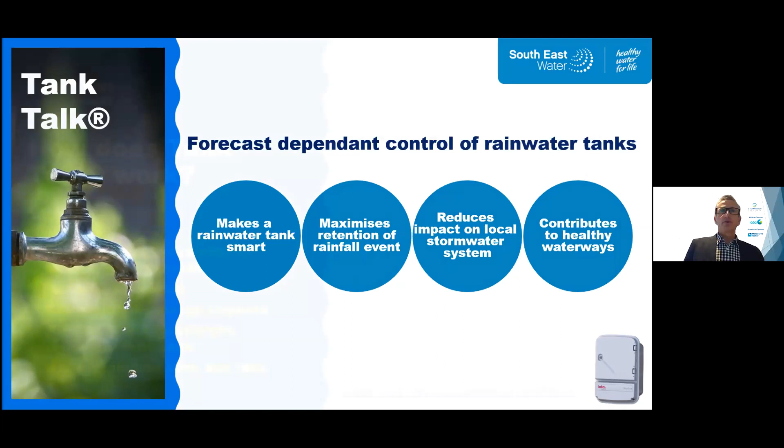I'll give an example of how that is working. Through the OneBox technology, we're able to receive weather forecast information a day or further out, and we're able to make predictions about what kind of space we would like to make within the rainwater tank, and can preemptively discharge water from the rainwater tank to make space for it once the rainfall does arrive. So here's an example on the screen of a discharge happening and the days leading up to it.

The blue line is the level of water in the rainwater tank, and the green line shows rainfall events recorded at a local bureau rain gauge, not immediately on site but nearby. On the left-hand side of the chart, there's a rainfall event on the 11th of August that fills the tank, then another rainfall event fills it again.

Each time, the OneBox technology calculates whether that rainfall event can fit in. On both occasions, it knew from the level in the tank plus the available roof space it was catching from that it could fit the rainfall event in the tank, preserving that water for household demand.

Further towards the right-hand side of the chart, the tank talk device received weather forecast information that a significant rainfall event was happening. That little red blip indicates the valve has opened. You can see the blue line of the tank level decreasing, followed by the rainfall event that then refilled the tank again, so the majority of that rainfall event was captured within the tank.

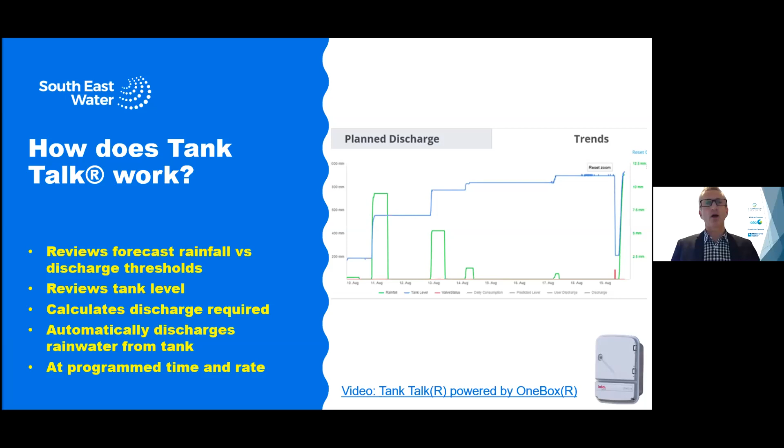We're beginning to apply this in a number of ways.

It can be applied in the residential setting, and we're rolling it out in our Aquarevo estate, which we'll talk about shortly. It's also finding application in office and apartment buildings—we've got it fitted on our own office block in Frankston at Water's Edge, and we have another apartment site in the Fisherman's Bend precinct that we're using as a pilot and demonstration site for much more intense living.

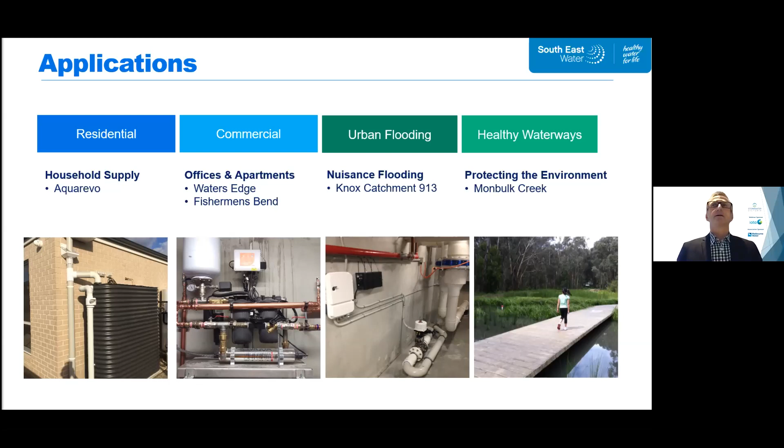We'll talk about Knox and Monbulk Creek and how we're using that for nuisance flooding and for healthy waterways, and we will discuss those shortly.

But before we get there, I wanted to briefly talk about some of the research we're doing with Tim Fletcher's group, the Waterway Ecosystem Research Group, of which Daniel Zhu, our PhD student, is sitting on the panel today—so please throw all the hard questions at him at the end.

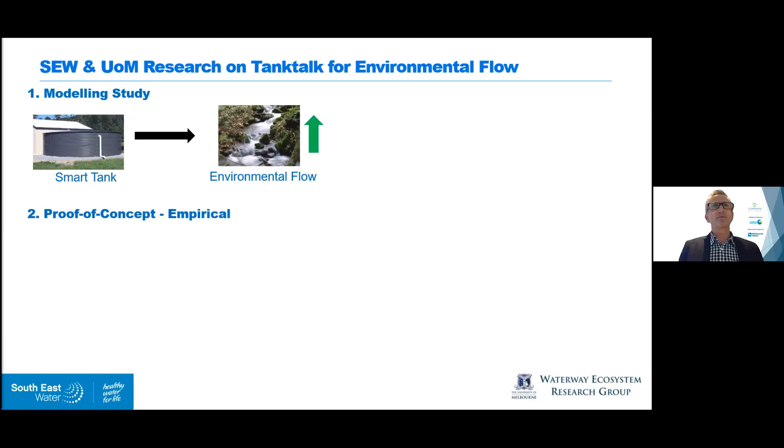This has been a study we've been doing for a number of years, primarily a modelling study that has looked at taking real rainfall events and real demand to demonstrate how we can best achieve these multi-objective outcomes of environmental flow, stormwater retention, and household demand.

Through Daniel's work, and he's published papers on this, we've been able to demonstrate that this is possible with the right tank size, the right catchment size, and the right thresholds for the system to operate within. It's possible, and we've also developed an understanding of how to flex to favour one scenario over the other—and we can continue to use that model.

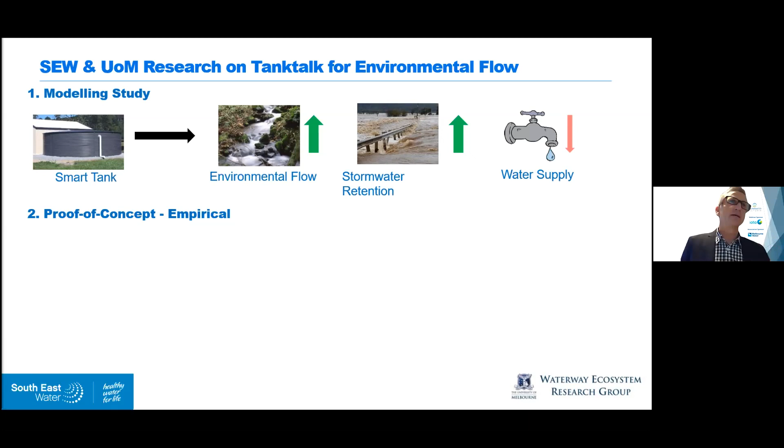Daniel has also been testing out that model, and we have a fully equipped house—a real person's house in Caulfield—that has the tank talk set up and was prepared to let us add even more monitoring equipment so we can monitor all the ins and outs, know the rainfall on site, and start to validate some of the outcomes of the model.

We simulate, more than simulate—we're actually doing stream flow releases on site. That's given us some very valuable learnings, and we're continuing to optimize that.

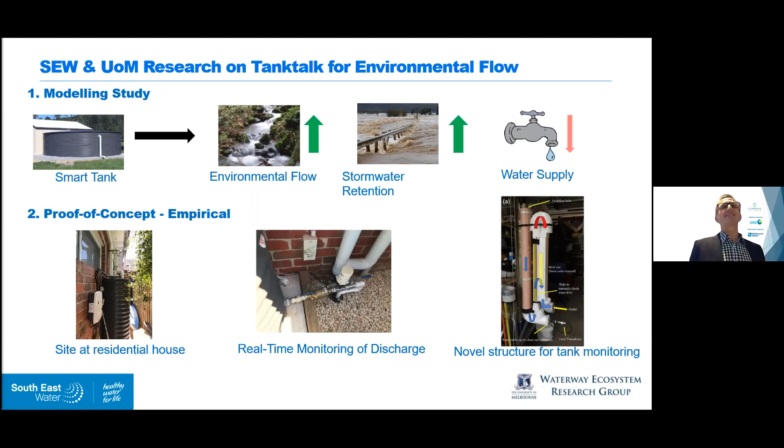So let's see if this video works. It's a very short video—Daniel happened to be on site knowing when a discharge was scheduled to happen.

This is a scheduled discharge simulating what we do into a stream flow. In this case, this was about a 5-litre discharge happening every hour. We've been able to decrease that amount, and that's part of the ongoing optimization, down to 1 and 2 litres an hour. We can change the time frame of that, and we can change when it happens during the day.

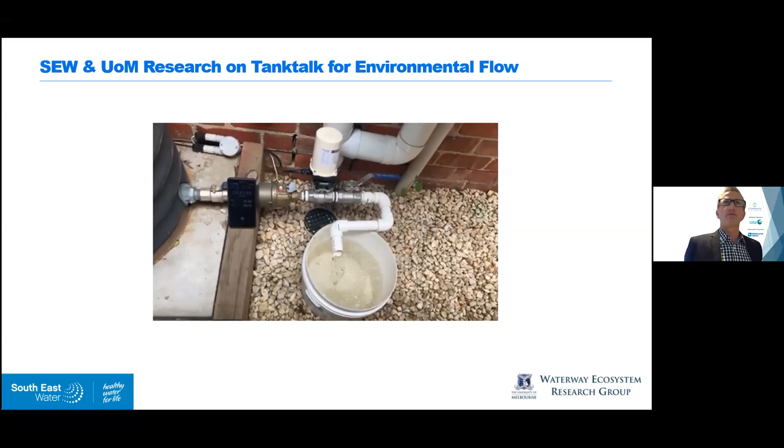So that's an example of how we're validating the model in a real live environment, showing all the ins and outs. Further building on that research work, through our own experience and through Daniel's research, we've understood that it can be quite limiting to only have a 1-day look-ahead on the forecast period—weather does change, we all understand that. So we've been working to improve the forecast accuracy, and hence the data that Tank Talk uses to determine its discharges.

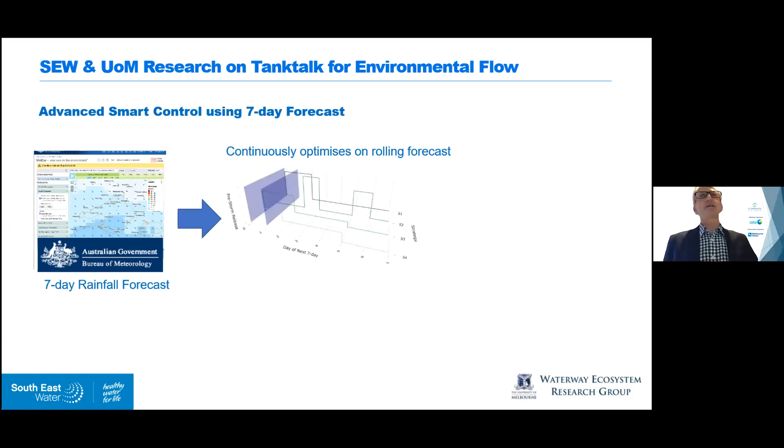So Daniel's been developing a modelling system that looks ahead 7 days and continues to optimize each day as that rolling 7-day forecast moves forward, across 4 different scenarios, looking at how, if we were to apply that modeling outcome into a tank system, what would be the result on those multi-objectives we've been talking about.

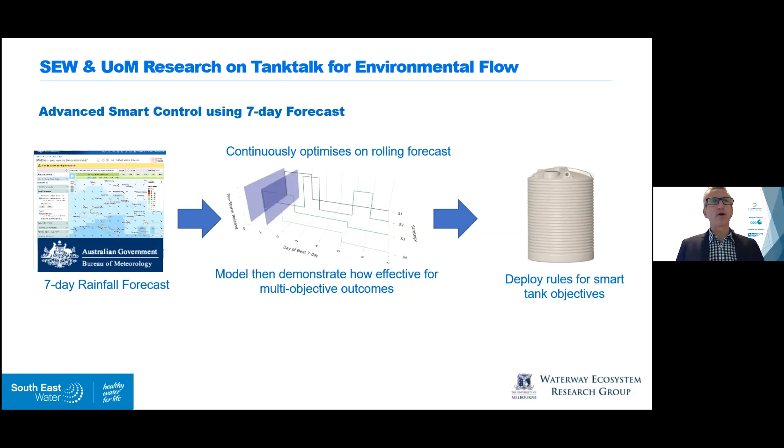So here's an example output of the model, where on the left-hand side, the top blue line is actual rainfall the model used, a real event. We can see the green line representing scheduled discharges, actual discharges from the rainwater tank.

On the left of that chart, the model decided that within the 7-day look-ahead period, there was rain coming, so it would do a release. Then, as the forecast changed, it's more about a forecast change than error, it decided to do another discharge.

The whole time that green line is maintaining an environmental flow into the system, such that when the rainfall did actually happen, the red line shows the overflow that would have happened from the tank without the smart system in place. There are follow-up rainfall events showing significant overflow from the tank if the smart system wasn't involved.

It continues further down the track to return to maintaining that stream flow. So there's plenty of optimization still in the modeling, but we've been able to demonstrate and continue to improve, and we'll look to apply this 7-day advanced forecasting on some of the sites we have.

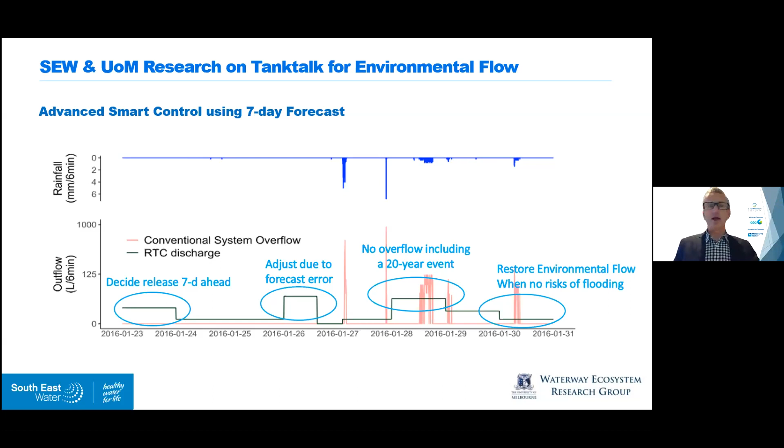I want to move on to Aquarevo. Aquarevo is probably our most progressed and advanced deployment of smart tanks in the real world.

Briefly, maybe some people are sick of hearing about Aquarevo, we've been talking about it for a while, but really quickly, Aquarevo is a residential estate in Lyndhurst near Cranbourne, southeastern suburbs of Melbourne, with 460 lots jointly developed by South East Water and Villawood.

There are now well over 100 houses being built and occupied on the estate. Each of those houses gets a rainwater tank supplied and maintained by South East Water. That rainwater tank provides rainwater for hot water for shower and bathing.

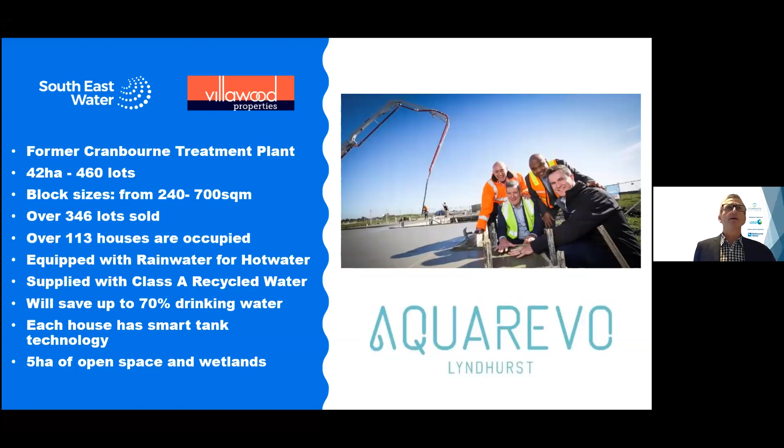That system is monitored and controlled by our Tank Talk technology as well, to make sure it's operating as it should, with any alerts and alarms that we need to respond to. So here's some drone footage of the Aquarevo estate.

This was taken late April. So some real quick features I'll point out: there's the extensive waterway running down the middle of the estate.

This view is about half of the estate, the southern half. There's this much again looking back the other way. That waterway is extensive, connecting at the top of the screen, the south end of the estate, with the Marriott Waters waterway. It actually creates an extensive network, quite a few kilometres of waterway in that area.

If you can see, there's a roundabout in the middle of that picture. Go to the top left of the screen to another roundabout. There's a house on the corner there, to the right of that roundabout.

That is our house. That is the Aquarevo house where we continue to develop and test new technologies and approaches, and optimize things we do in Aquarevo. I will hopefully get time to touch on that house later in the presentation.

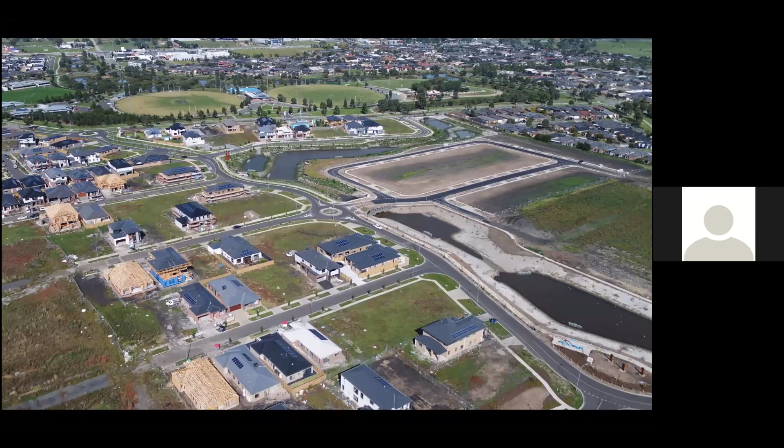The other thing I'll draw your attention to on this slide is the size of the houses. We continue to be staggered by how big some of these houses are and how much of the block they continue to take up.

The size of the house is not something we have control over, but what we do have control of is how much of the roof they catch for rainwater. There is a minimum of 100 square metres that they must capture into their rainwater tank on their site, otherwise they don't have approval for their building and house design to go ahead.

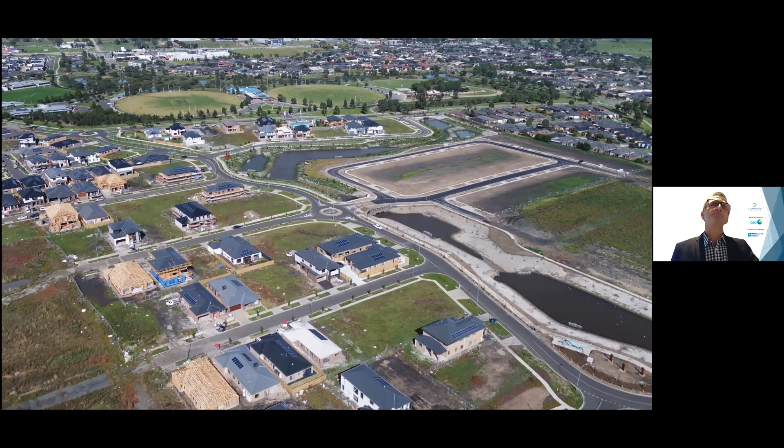So we are installing Tank Talk on site at Aquarevo. I'll move to the next one.

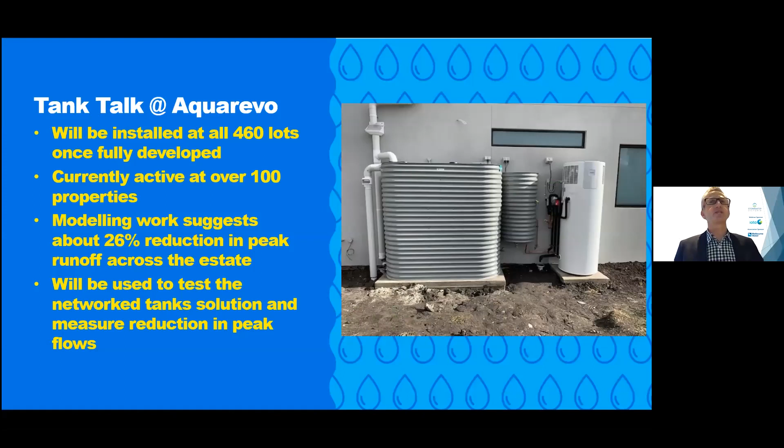We're now getting to a scale in Aquarevo where we're actually starting to see the system work and getting enough data as people are moving in, some very preliminary data. We haven't shared this with anyone yet. We did some analysis in preparing for this presentation, and we'll continue to update this progressively.

In May, for example, 62 millimetres fell on site in Aquarevo. We captured over 300 kilolitres of that in the tanks of Aquarevo houses, across 60 houses. We just looked at a subset of 60 houses in this particular piece of work.

176 kilolitres of that rainwater was actually used, and 61 kilolitres were discharged by Tank Talk, preempting a number of the rainfall events that then fell on site. Our analysis so far is actually showing us plenty of opportunity for improvement, which is great.

What we get when we start to scale these kind of technologies is the potential to maybe use some of the 7-day look ahead forecasting that Daniel's working on. We still believe there's some significant overflow happening during these events. We'll look to try and adjust some different thresholds to capture more of that while still not leaving our homeowners short on the rainwater they have for use in their hot water systems.

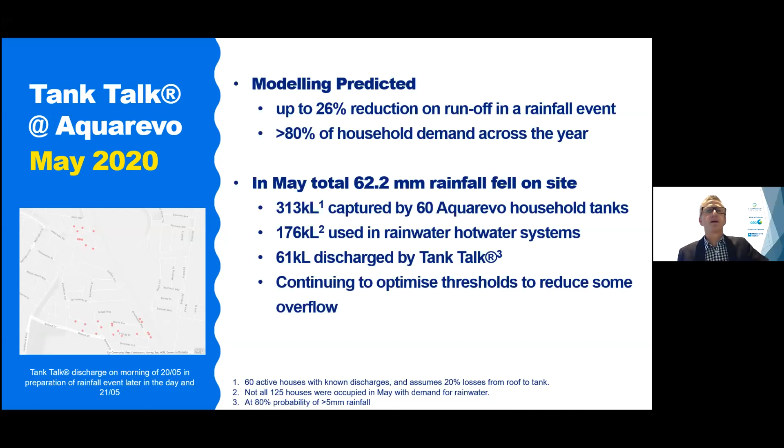I'm going to move on to the work that's going on in Knox, and again, I'll size the panel for later in the session to take a number of these questions. Credit to Carolyn Cavello as well, who's no longer with Knox, who's had a vision for this for many years and has worked with us and others trying to understand how to better treat a number of their catchments that are subject to nuisance flooding in an urban space that's very constrained about what they really can and can't do.

All of this area is impacted by nuisance flooding, and a lot of this area is very constrained about what can be done in terms of either putting in larger pipe work for stormwater or putting in second pipe work. Many of these houses are too close to an easement, which would undermine the structures of a lot of these houses and even the commercial properties, making such a pipe work replacement process unbelievably expensive and difficult to do.

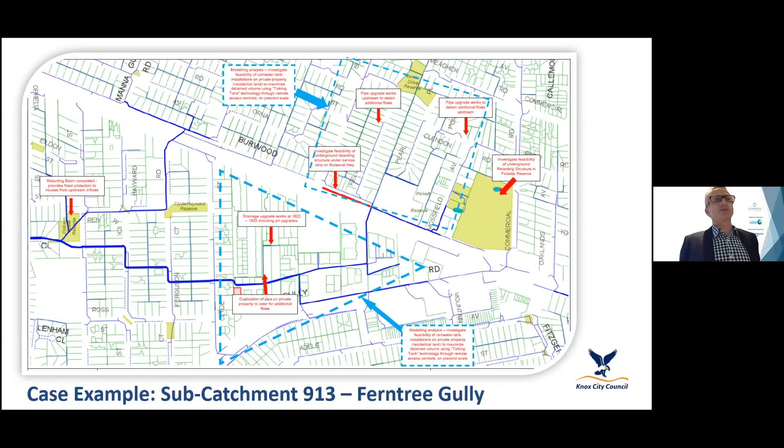Hence, really the need to look for something step change, game changing, in how to approach this catchment. Hence the coming together of our conversations over time: well, rainwater tanks in this space, yes. Well, what about smart rainwater tanks? And so over time that got built into the modelling. So really the project was to look at, can we apply smart technology in a fully developed and constrained flood catchment area.

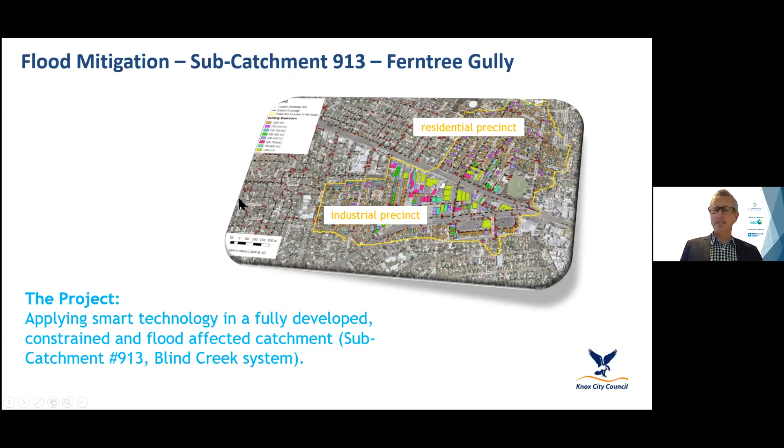This is perhaps a better way of showing that the upper side of that precinct or catchment is residential. There's this industrial precinct that then further leads into further residential in that space. Quite a bit of modelling has gone into this over quite a few years through Water Technology and Engeny. It is a very constrained catchment, as we see. It's at the foot of the Dandenongs. It's steep, what enters into that space.

And really the conclusions that we reached needed to look at was very much a multi-solution approach: yes, looking at retarding basins and redesigning those levees at sports grounds, some pit and pipe upgrades, rainwater tanks, yes, but really what tipped it over in terms of making this a potential real solution was making those tanks smart, which meant that those tanks across the precinct would be empty, or as empty as required, to be able to capture the rainfall event and take stormwater out of the system at the time, reducing the flooding potential.

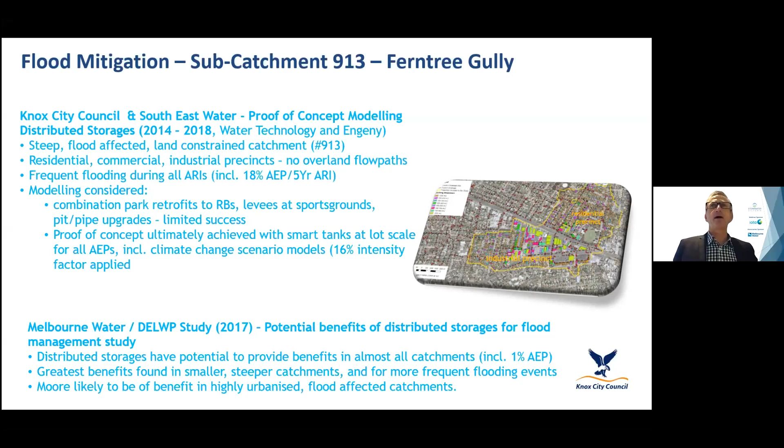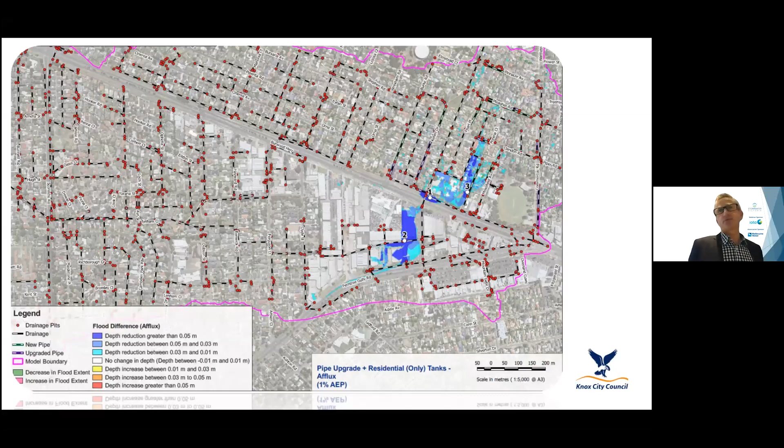So a couple of quick modelling outputs - any questions on these, point them at the panelists at the end. Just two of these: this is demonstrating that through the things I mentioned - retarding basins, bunds, and rainwater tanks in the residential area at the top right - that did improve the depth reduction of flooding. We can see that in the colours, that's depth reduction. It did have an impact in the residential area and the industrial area.

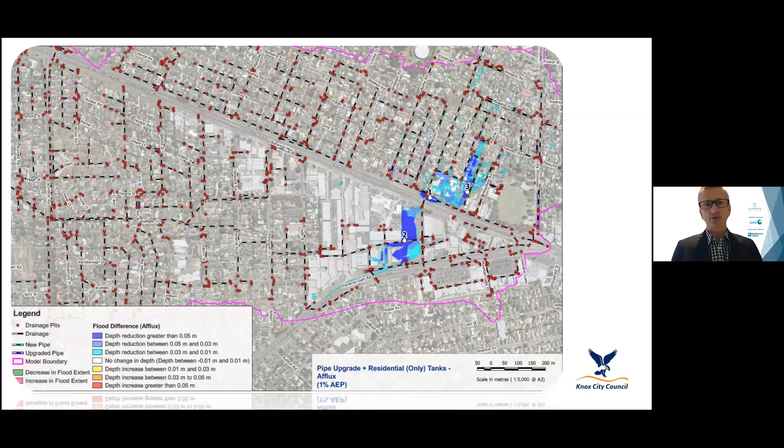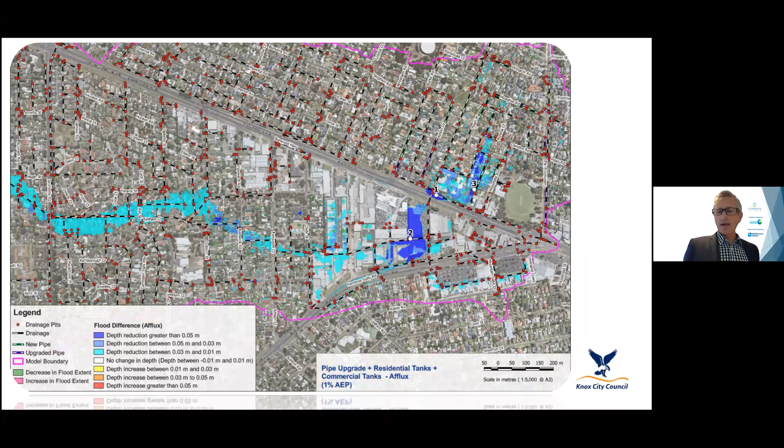So where are we at in this one at the moment? Yes, Knox is at the capital approval stage. We're also at...

We have a further brief out with Alluvium Consulting on this one at the moment, and that is around what are the possible governance arrangements around this.

We've got, and that's the great thing that's got us to this point, very much a multi-partner approach to this. Knox, Melbourne Water, and Southeast Water is the water utility in this space. Governance ongoing - how are we going to own it, operate it, maintain it? For example, if this is a way around replacing some traditional assets like pipe upgrades, should the traditional asset owner pay for it? Should Knox pay for it? Should the ratepayer pay for it? Should the technology provider pay for it and maintain it ongoing?

So Alluvium are consulting, working up a number of options for us to consider in this space, as well as customer strategies. We need to maximize the uptake and understanding of how these tanks can be used to make sure this is a successful deployment. That report, I think, is literally due any day, or the first draft of it.

I'll move on to the next example being Monbulk Creek, which has been a collaborative approach with Yarra Ranges City Council, Melbourne Water, and Tim Fletcher's Waterway Ecosystem Research Group, the WERG. This has been one of the outcomes from DELWP's Integrated Water Management Forums, and is also within the Healthy Waterways strategy - it's a priority of Melbourne Water's Healthy Waterways strategy.

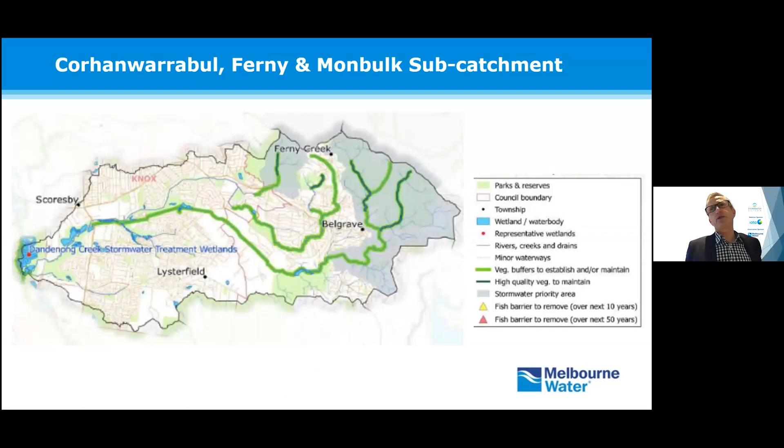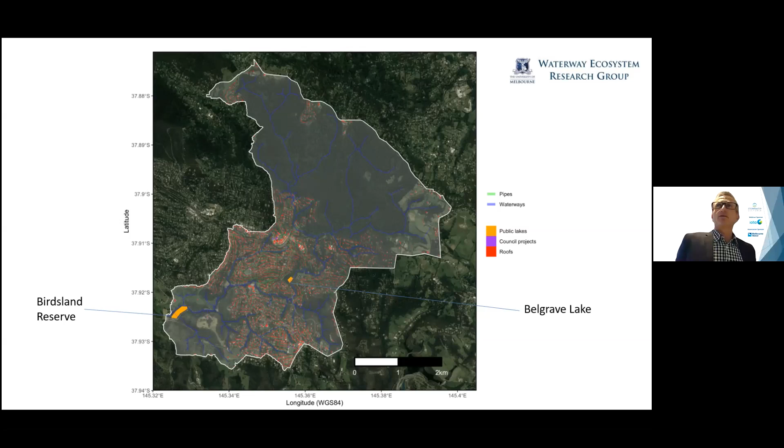So the overall objective in this space is to really look at how we can provide and assure appropriate stormwater and environmental flows to protect the habitat and environment around Monbulk Creek, and that habitat environment of the platypuses that are there.

Forgot to mention, platypuses are extensively through Monbulk Creek, and there have even been reported sightings further down into Rowville in that kind of system - an important area for us to protect.

So the second objective is to develop and demonstrate a proof of concept of how we can actively manage an urban stream flow, such as Monbulk Creek, through the use of technology, through assets in the public and private realm, to demonstrate we can protect a habitat like this.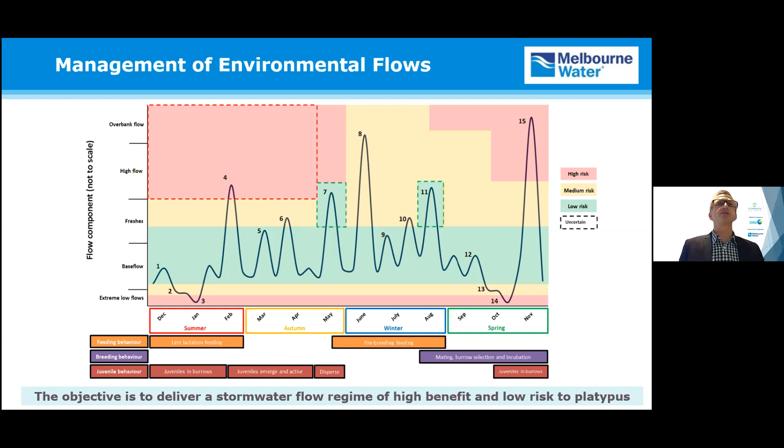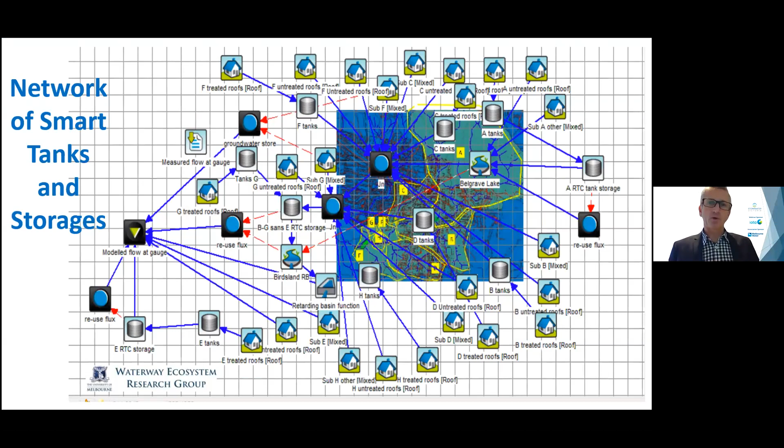So the platypus can breed, can feed, and those juveniles can grow up to be healthy and continue the cycle. Sorry for a messy slide, but the point here is through the University of Melbourne's initial modelling, they were able to form a view that yes, this can work if we're using rainwater tanks, smart-equipped rainwater tanks across that catchment, as well as controlling the water in a couple of the largest storages within the area, the Birdsland Retarding Basin and Belgrave Lake.

By using this combined strategy of the rainwater tanks and these large basins, we believe we can take the peaks out of those rainfall events and then use the water to continue providing environmental flows, while still balancing enough water for good amenity and recreation.

There's obviously an extensive piece of community consultation we need to go through here, because these are effectively community assets. I'm sure they don't want to see empty lakes at Belgrave Lake—they still want to be able to use them. So what is the right amount of water that they would accept not being in there in summertime, so that platypus can be protected further downstream?

What we'll be doing in this space is using the same Tank Talk technology and control systems to control the amount of water, the level and volume, and the amount being released from these larger storages as well.

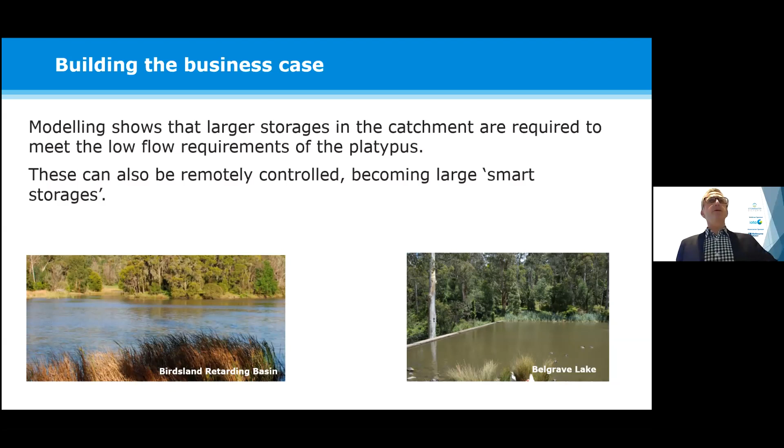Currently, we are looking for some pilot sites for the Tank Talk technology, for demonstration on assets in that area. Melbourne Water are doing the functional design for the release mechanism on those larger storages, and we're applying for a grant for the Uni of Melbourne guys to continue researching and studying the results of what we're doing.

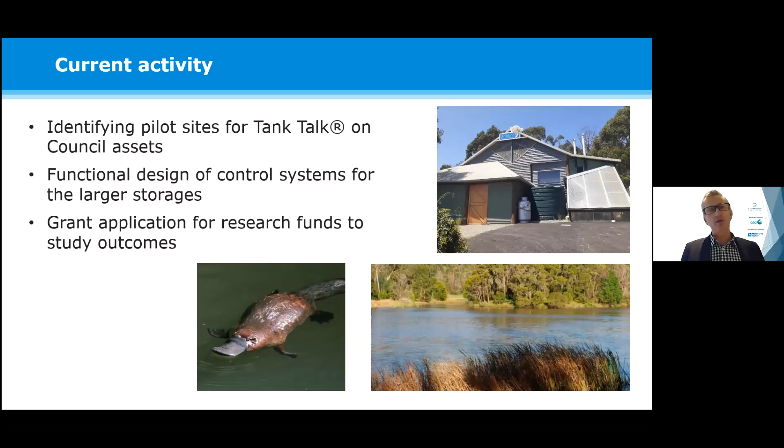The last thing I'll touch on is an opportunity we're continuing to work on through our house at Aquarevo—really, how can we use smart tanks for greening and cooling? The feedback we often get is, well, you're releasing this rainwater into the stormwater system, what a waste. Homeowners think we're stealing their water from their rainwater tanks and releasing it to stormwater.

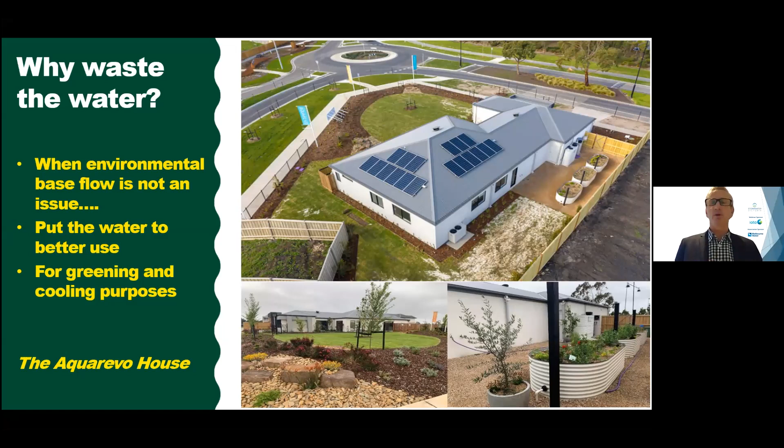But if we're able to use the rainwater in those tanks to also contribute towards irrigation around their home, and potential cooling around their home, we think they'll get an additional benefit from using that stormwater on-site in a way that makes for greener, cooler homes.

So we're collaborating with a different group at Melbourne Uni to study the site. You can see on the screen here we've got monitoring stations in place, our own sensor network that feeds back into the OneBox on site, so that the OneBox can actually control where the irrigation needs to be, where the misting and cooling needs to be, so that house will be a cooler place to be.

So instead of discharging its stormwater prior to a rainfall event, probably using Daniel's 7-day look-ahead, and even including heat waves as well, we'll look to use that water around the home in the smartest way possible.

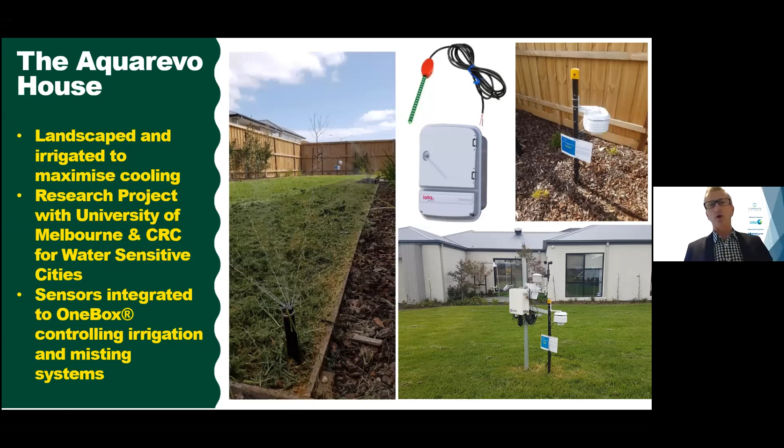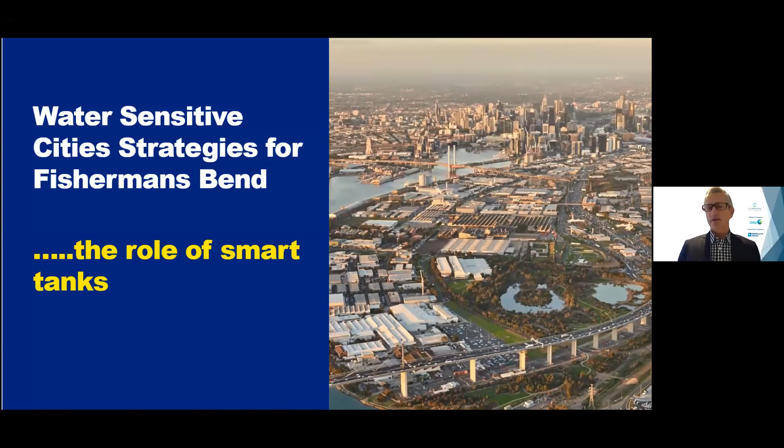In terms of my time, I'll be wrapping up here. I was going to briefly mention Fishermans Bend, but the plan is to use it within that environment as just one of the possible solutions there as well.

So just to wrap up, to give you plenty of time to interrogate our panellists—really, the ability to manage this multi-objective approach of water supply, flood management, and environmental baseflow, we believe, requires a smart approach. The enabler is putting smart tanks on the more conventional rainwater tanks and other storage assets, in combination with other WSUD approaches we're becoming more and more familiar with.

So far on all these projects, you can see that partnerships are key—who we're working with, trying to work out and achieve the benefits for everyone involved. And then, as an outcome of that, what's the right way for the governance and engagement of the customer—these are key outcomes that are coming through now.